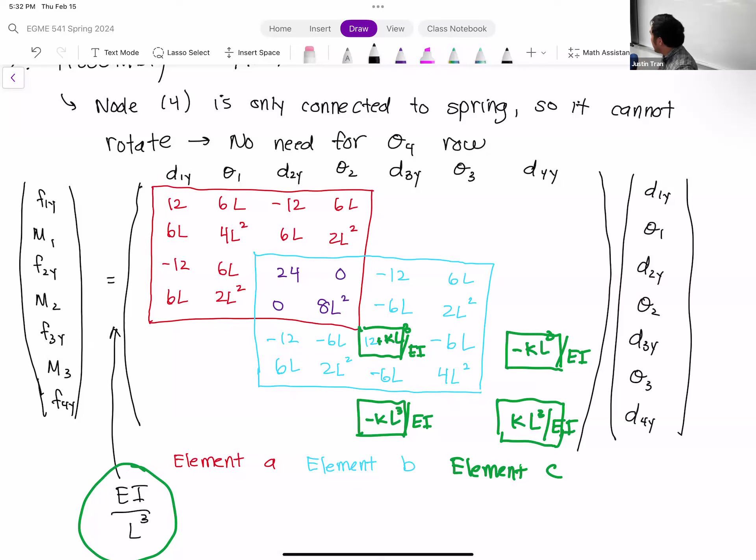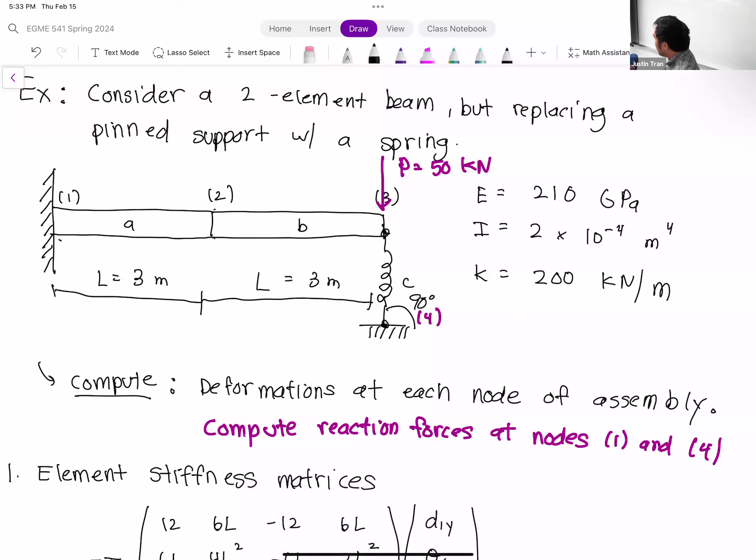The first thing we noticed was that beams' deformation modes are different than springs. Beams are capable of transverse deformation as well as rotation, whereas springs are only capable of expansion and contraction, which are axial deformations. If you look at the geometry for this problem, I put the spring perpendicular to the beam deliberately, combining both things. When the spring does its axial deformation, it's actually in the same direction as the beam's transverse deformation. So that allowed us to treat our spring here as a one-dimensional element instead of going through the whole two-dimensional 4x4 system.

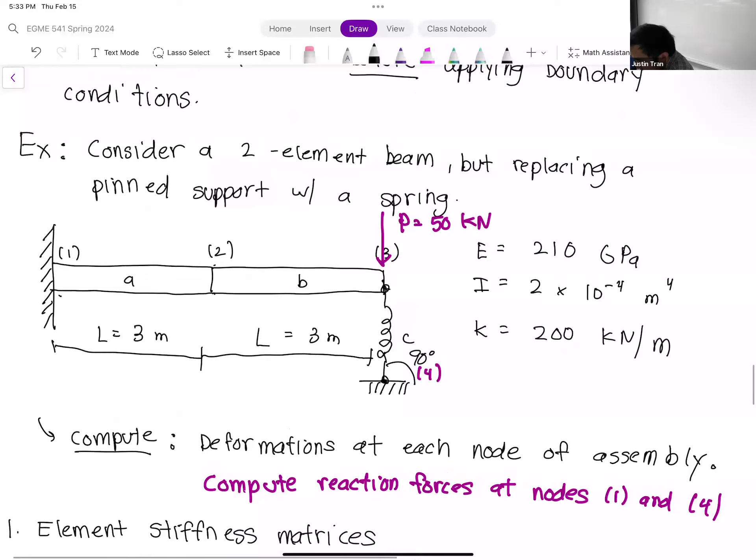What if the load was placed somewhere else along the beam? Would the effect still be the same? It would, still perpendicular? Yes. So if the load were placed here on node 2, the element stiffness matrices would all still be the same. Now if the force were in this direction, let's say we're doing an axial force here, we'd have to change our approach a little bit because the beam can't handle any axial deformation. In that case, we'd either change this to maybe a truss element, or maybe a frame element, which is capable of both axial, transverse deformation and rotations all at once. So it depends on the nature of the loading - you want to make sure your loading is consistent with the deformation that's allowed.

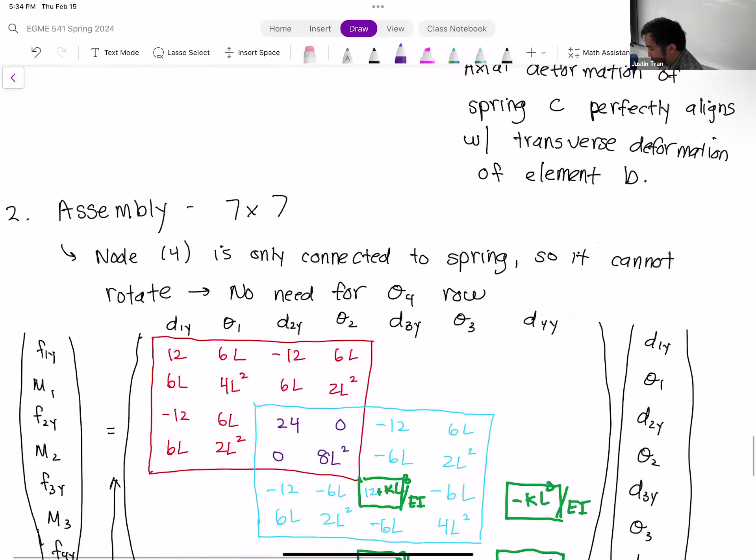Now that we have this 1D element for the spring, we can go ahead to assembly. That's what we left off with. When combining beams together with springs and trusses, you have to be aware that we often like to factor out EI over L cubed in front. If you're just doing a problem with beams, this is no issue, and you can fill the space here without problems. But notice the spring here...

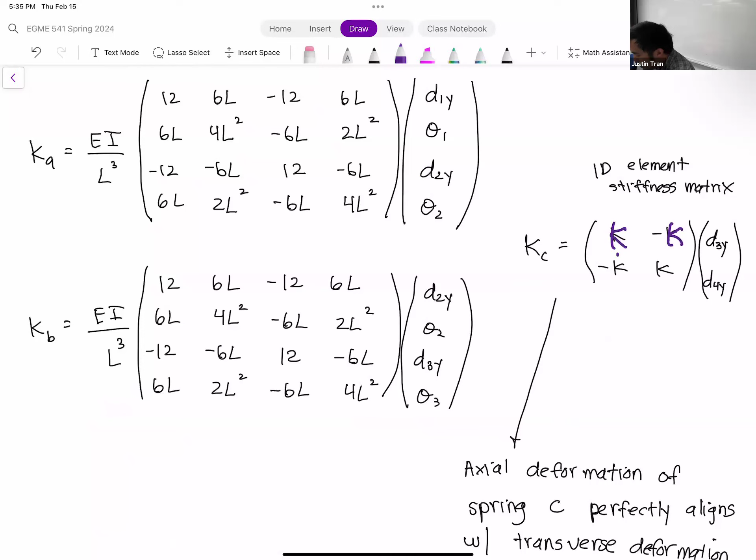The spring element stiffness matrix is only comprised of the spring constant K. So when we incorporate this into the element stiffness matrix, we want to make sure that everywhere we put the spring, it equals just K in that slot. What I did here was add K, but multiplied K by the inverse of the factor out front, so I have K L cubed divided by EI. When you multiply this factor through, it cancels out that factor and you end up with K. So you just want to be consistent with the units here.

This gets mostly dicey when you're combining different types of elements. We'll see this again in the next unit with frames as well. But that's just a small thing I wanted to make sure you guys caught.

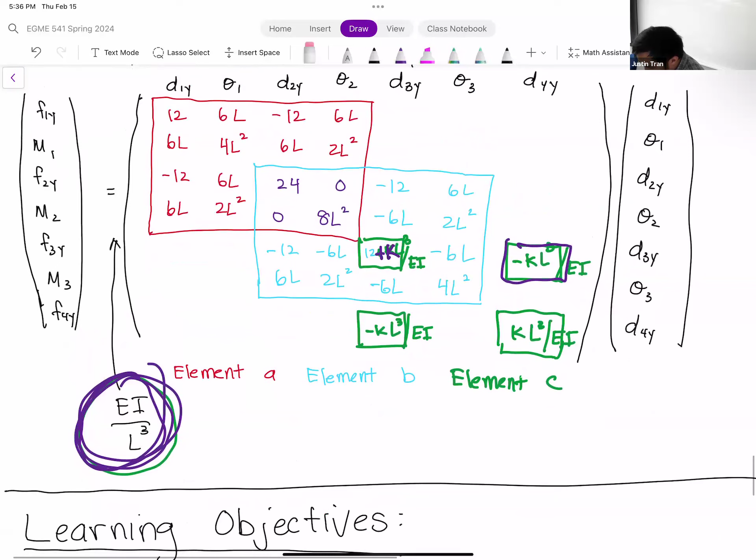Now that we've assembled all the elements, it's time to apply the boundary conditions. Our boundary conditions in this case are two fixed supports or fixed constraints. These are occurring at nodes 4 and node 1 -- I don't know why I said it in that order, it should be 1 and 4.

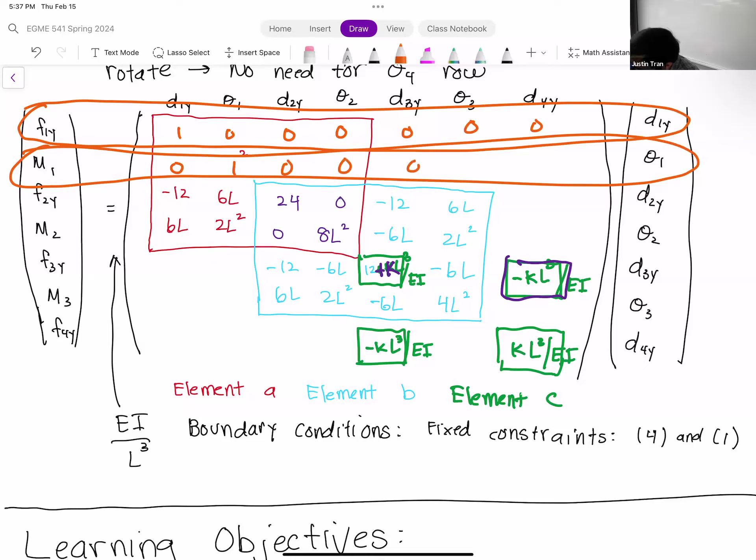What this basically means is that for any degree of freedom associated with node 1, so that's d1y and theta 1, we're going to apply our Dirichlet boundary conditions on these rows. We're going to change everything to 0 except for the diagonal: 1, 0, 0, 0, 0, 0, 0, and then 0, 1, 0, 0, 0, 0, 0. And in the forcing vector, we're going to transform those into zeros as well: 0, 0, 0. Then we'll apply the same on node 4.

But remember, node 4 was only connected to the spring, so we only have d4y. That means only this last row, the d4y row, gets transformed to zeros: 0, 0, 0, 0, 0, 0, 1.

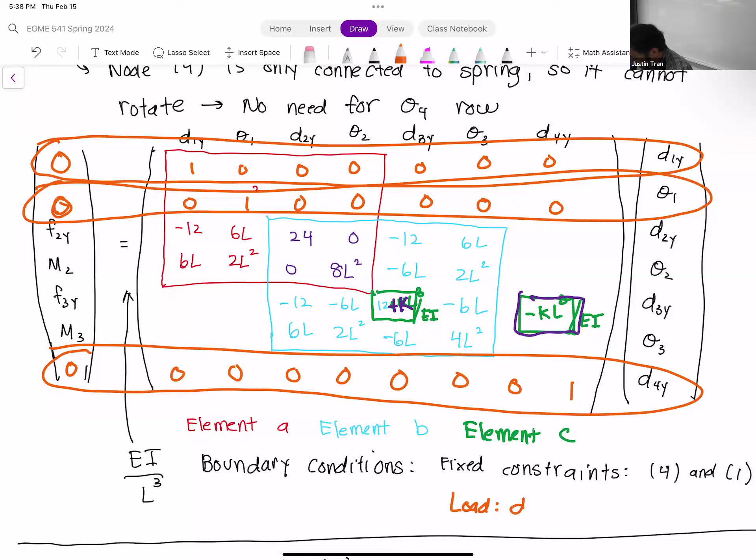While the iPad's catching up, or the internet's catching up, let's look at our loads. In this case we only have one load, a downward load applied on node 3. I believe it's node 3 -- let me confirm that. Yes, we have a 50 kilonewton load being applied on node 3.

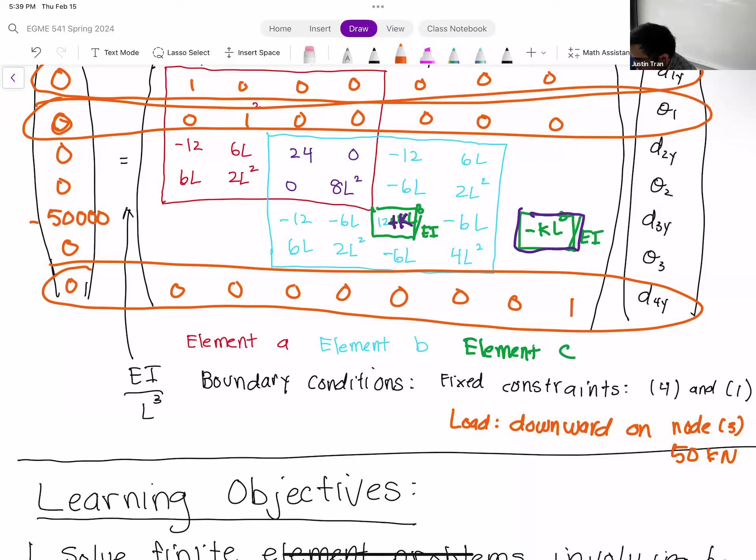So that means we're just going to change F3Y into 50 kilonewtons, that's minus 50,000. And of course everything else in the forcing vector that we don't have a load for, we're just going to apply 0 for that. So F2Y, M2, and M3 are all going to be 0. And all the empty space in the global stiffness system is going to be 0 as well.

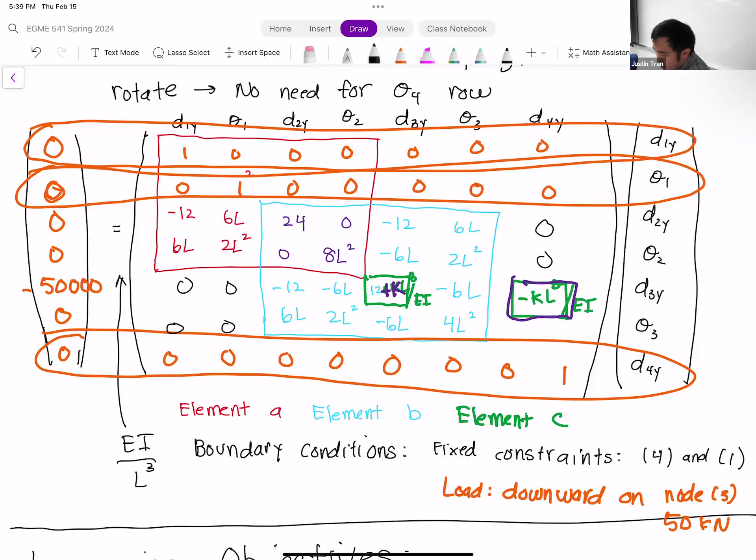So now our system here is ready to invert, and we can plug these matrices and vectors into MATLAB and solve for their result. And so the solution from MATLAB is the following.

We have d1y and theta 1, both of these are 0 because of the fixed constraint boundary condition. Then we have d2y and theta 2: d2y is minus 0.02 meters, and theta 2 is minus 0.012. The units technically the rotations are unitless, but not really -- the units we typically use, computed from here, are radians. So they're not degrees. You can convert those radians to degrees if you want, but leaving it in radians is just fine.

Then we have d3y and theta 3: d3y is minus 0.0638 meters, and theta 3 is minus 0.016 radian. And then finally, we have d4y, which is just 0 meters -- that's the fixed constraint.

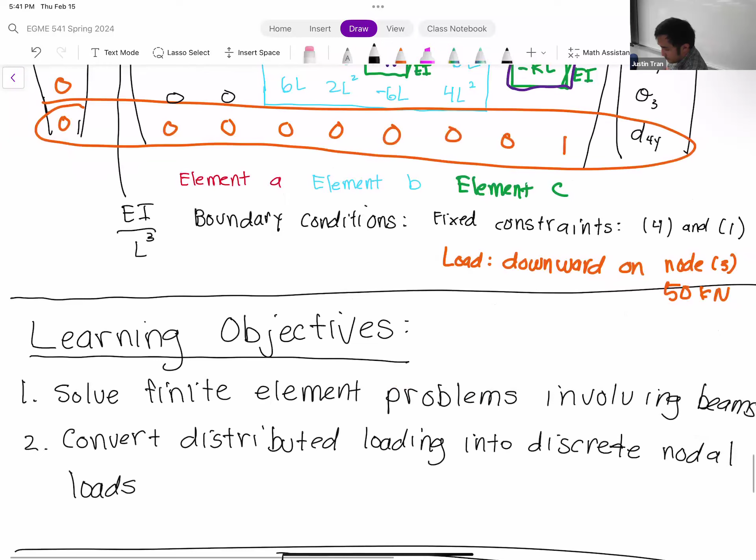Okay, so that's the solution for this. Any questions? Any other questions on this example here?

So the last thing I want to do with this example, before we move on to distributed loading, is compute the reaction forces. So if you remember from lecture Tuesday, once you have your deformation solutions, your values for d and thetas, you can plug that back in and solve for the reaction forces at the constraints. We have two constraints here, at node 1 and node 4. To keep the structure in static equilibrium, there have to be forces applied at these constraints to balance out all the forces in the system. Let's talk about how to compute that, or let's actually do it in this case.

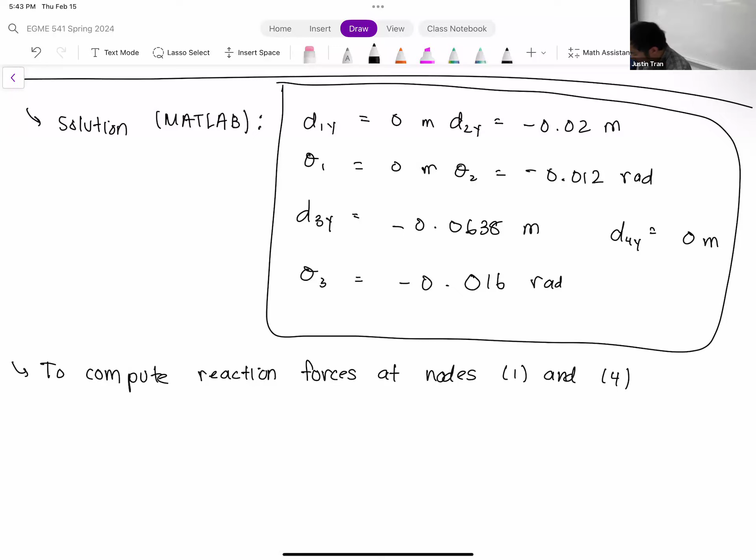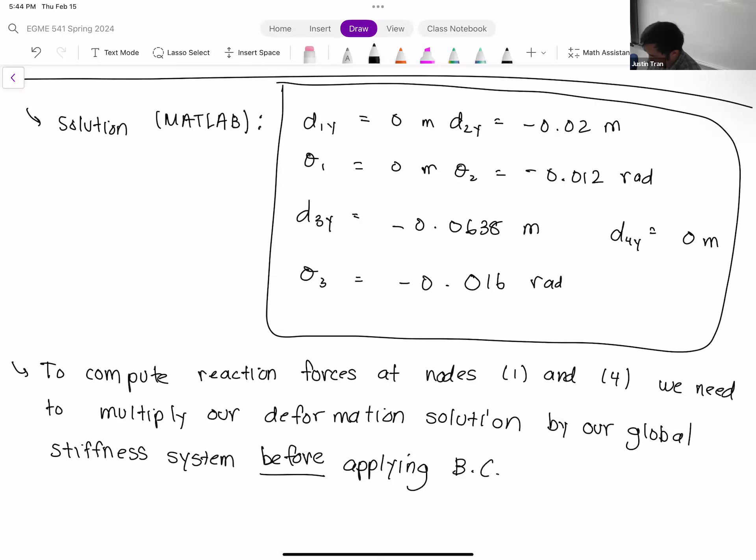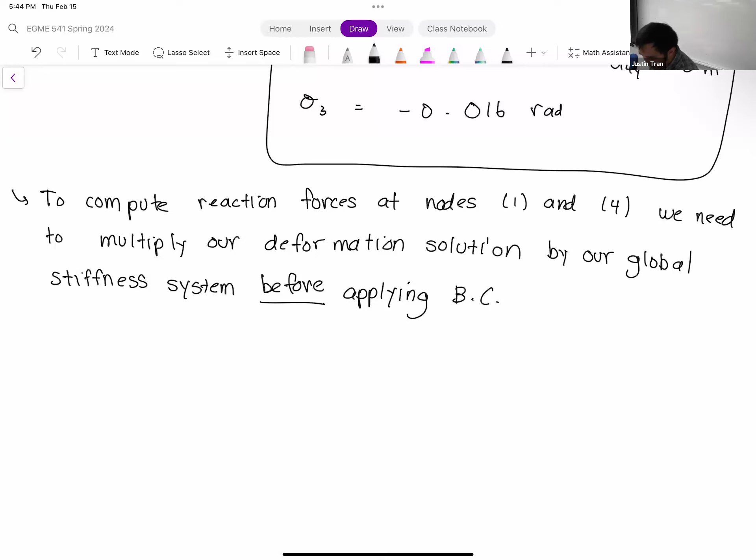To compute the reaction forces at nodes 1 and 4, where the constraints are, we need to multiply our deformation solution — that's the solution I have boxed just above this — by our global stiffness system, the one we had before applying the boundary conditions. Remember, this is right after the assembly step, before the boundary condition step. If you're smart and didn't erase the one we had before, this would be easy, but since I forgot we had this part, we have to write it again. So let me go ahead and write our global stiffness system again.

So EI over L cubed multiplied by: 12, 6L, minus 12, 6L, 0, 0, 0; 6L, 4L squared, minus 6L, 2L squared, 0, 0, 0. Of course all of these have numbers, but I'm just doing it symbolically so you can see. So you can see here I'm writing in the entries for the first element stiffness matrix, and we're just getting to the second one now.

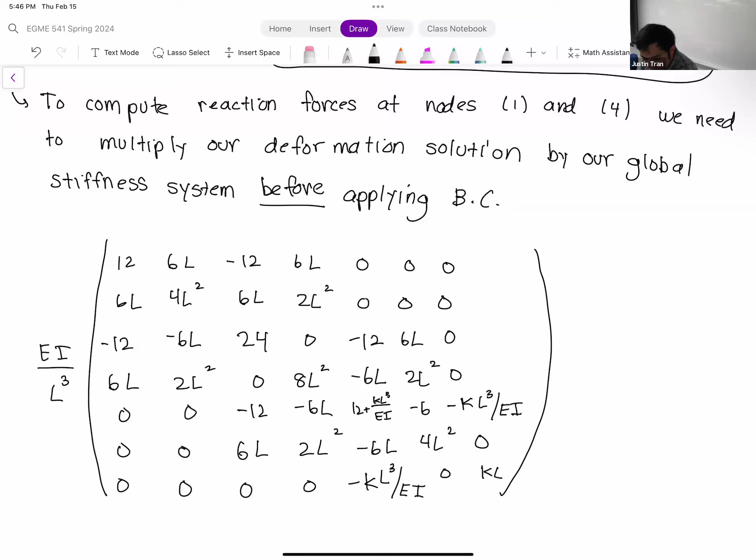Zero, zero, zero, zero, zero. Then minus 12, minus 6L. Then we have 12 plus KL cubed over EI, minus 6, and minus KL cubed over EI — those are the spring constant terms. If you already had this in your notes, I'm just writing it down for completeness since I erased the other one that was for the boundary conditions. But that's our 7x7 global stiffness system — what we obtained after assembling the element stiffness matrices for our 3 elements.

And we're going to multiply this by our deformation solution. So we have D1y, theta 1, D2y, theta 2, D3y, theta 3, D4. Since we already found the solutions for these, we can just plug them right in. So D1y is 0 meters, theta 1 is 0 radians, D2y is minus 0.02 meters, theta 2 is minus 0.012 radians, D3y is minus 0.0638 meters, theta 3 is minus 0.016 radians, and D4y is 0 meters.

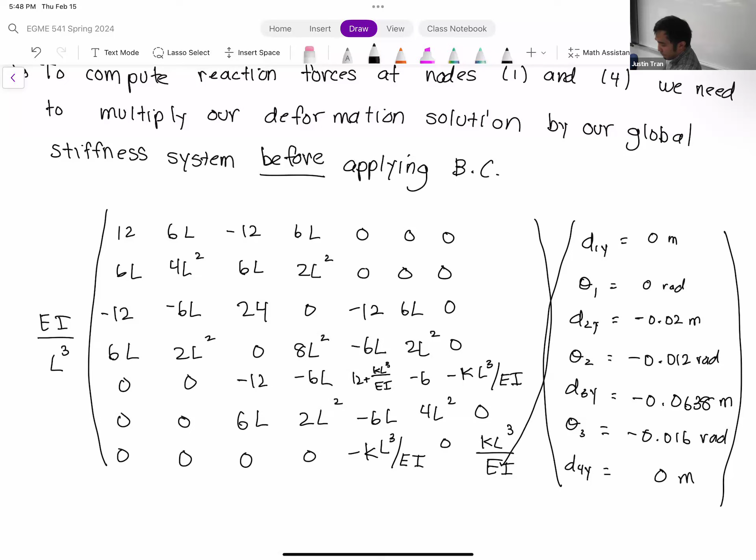So we have a 7x7 square matrix multiplied by a 7x1 column vector. This is most easily done on a computer — you can do it by hand, but it's going to take forever. If you have this matrix already in MATLAB, you can just do the matrix vector multiplication, and you'll get another vector solution here, which are going to be all the reaction forces: F1y, M1, F2y, M2, F3y, M3, F4y.

So we kind of do this a little bit backwards from what we usually do. In this case, we already have the deformation solution and we're solving for the forces instead. And so if you do this multiplication...

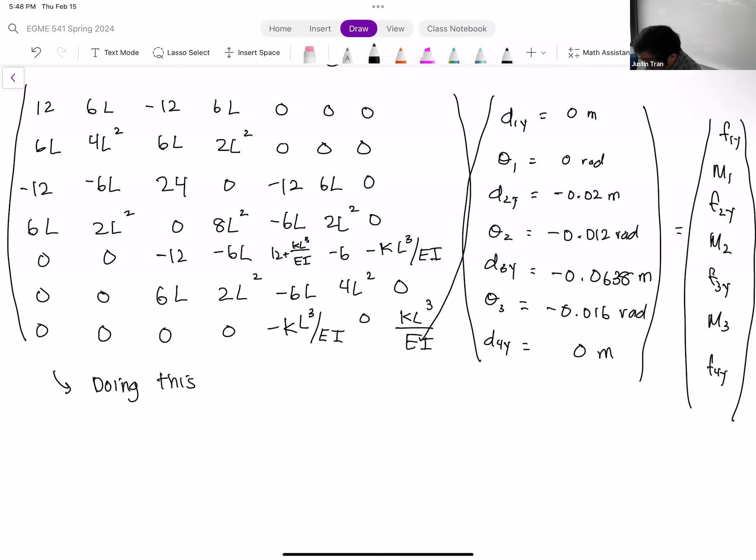You get the following solutions: F1y is equal to 37.23 kilonewtons, M1 is equal to minus 893.62 kilonewton meters. F2y is 0, M2 is 0 Newton meters. F3y — this is actually our original load, so this is minus 50 kilonewtons; that one's not a reaction force, that's the external force being applied onto the model. M3 is equal to 0, and F4y is equal to 12.77 kilonewtons.

All right, so it looks intimidating. There's a lot of values and variables floating around here, but it's just: you take your deformation solution, which if you're doing this in MATLAB you already have a variable for anyway, then you take your global stiffness matrix, multiply it, and then view the result.

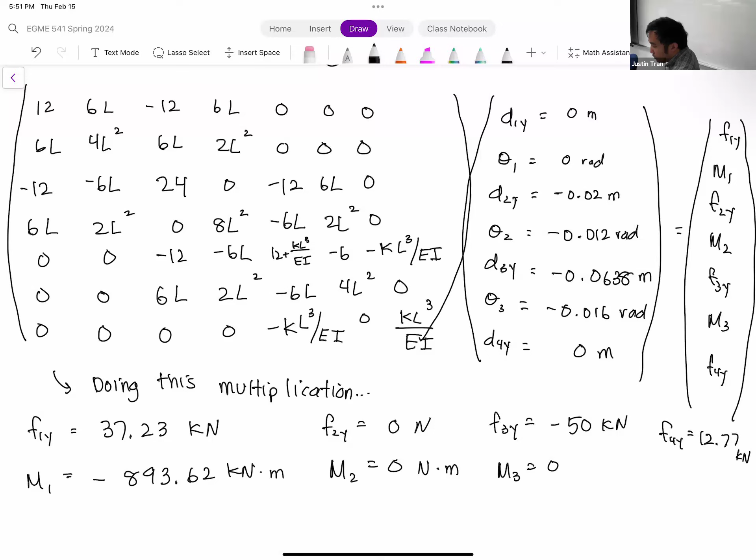To do that you would need to compute the stress in these elements. Remember what we talked about back in trusses, there's a way to compute stress by taking the deformation solution and multiplying it by its Young's modulus and things like that. You would need to test to see if any of those stresses exceed the yield strength of these materials. That's typically how it's done in these cases. It's going to be a lot easier to do in ANSYS, and once we get to ANSYS, probably a couple weeks from now, we'll discuss that there, because ANSYS computes these stresses automatically.

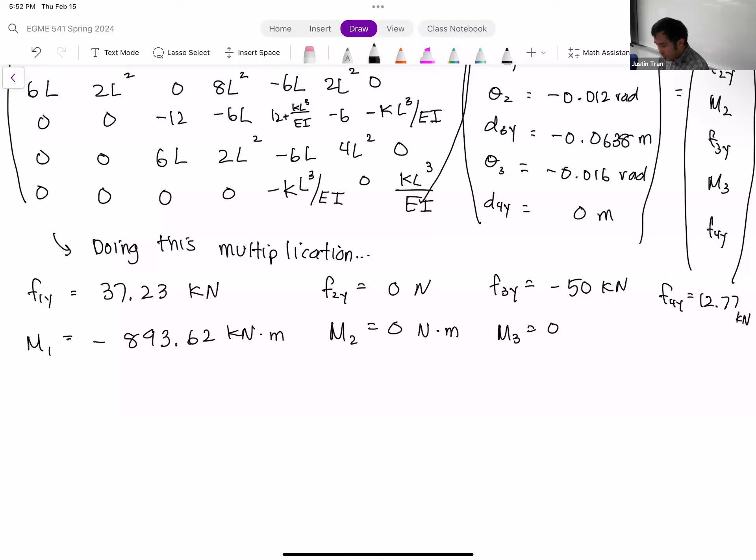Any other questions on this example? Okay, all right. So then the last topic I want to go over with beams is this topic of distributed loading.

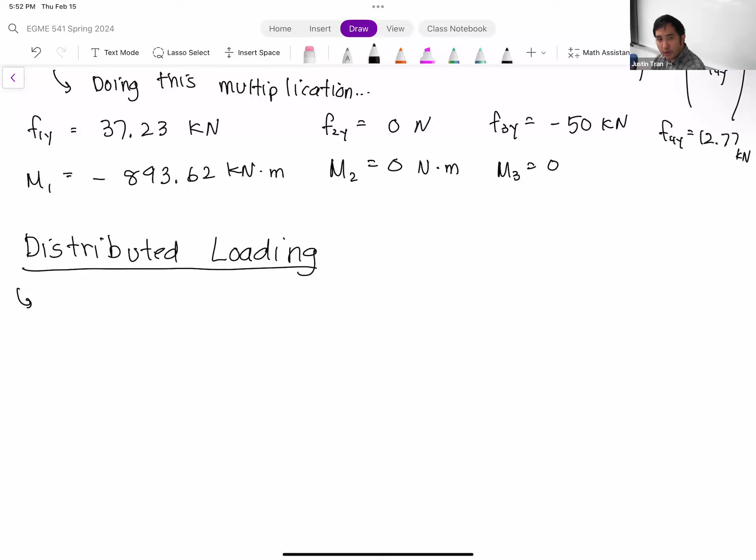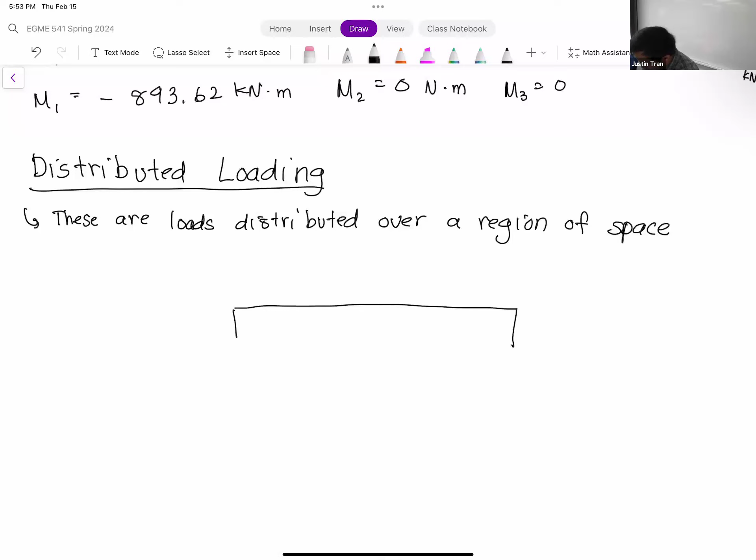A distributed load is a load that's distributed over typically an area, but we can be more general and say a load that's distributed over a region of space. Visually, they usually look something like this: if we have a beam, a distributed load would look like a load that's distributed over your entire beam, just like that.

So typically that's how we think of loading a lot of times, because what we've been doing up to this point in our direct stiffness problems is applying our loads at a point. If we have a beam, even if we break it up into, say, 3 elements A, B, and C, all the loads we've been considering have been applied at the joints in between the elements. Nothing distributed over the whole thing.

But the reason we've been doing point loads is that this meshes very naturally with the direct stiffness method. Think about how we apply our boundary conditions in our global stiffness system: when we have a point load, or a load applied at a point, we just insert that value directly into the matrix. So you can make the argument, and this is actually quite true, that in order to apply a load in a finite element sense, they need to be applied at what we call the nodes.

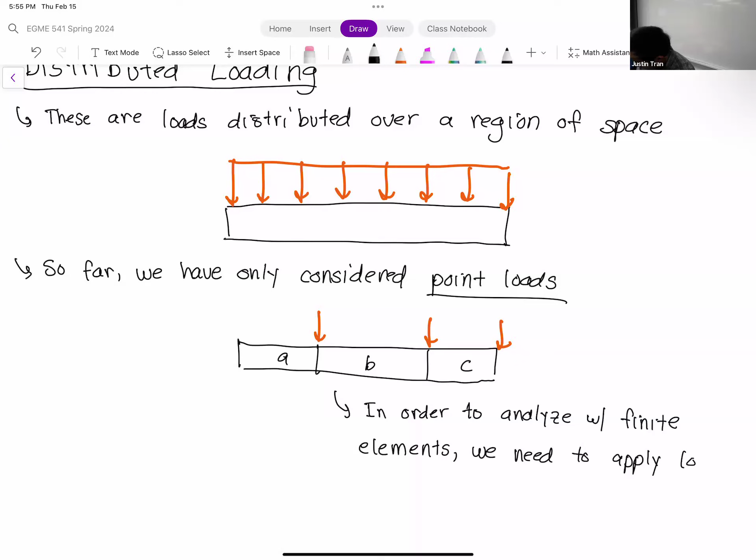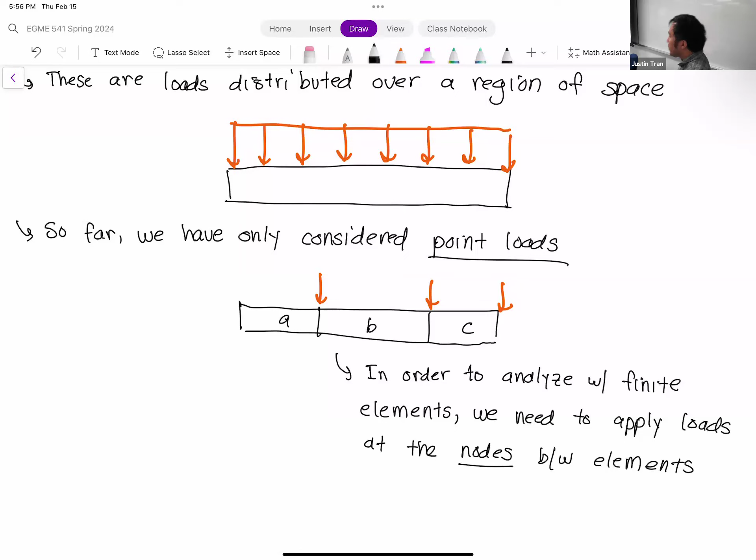We want to incorporate distributed loading, because that's often how we think of things. Let's say this beam is supporting a structure above it, so the weight is being distributed across the entire beam. Distributed loading is often how we naturally think of these loads, but we can't directly apply distributed loading in a finite element context. So we need to convert a distributed load to point loads so we can use that in a finite element context.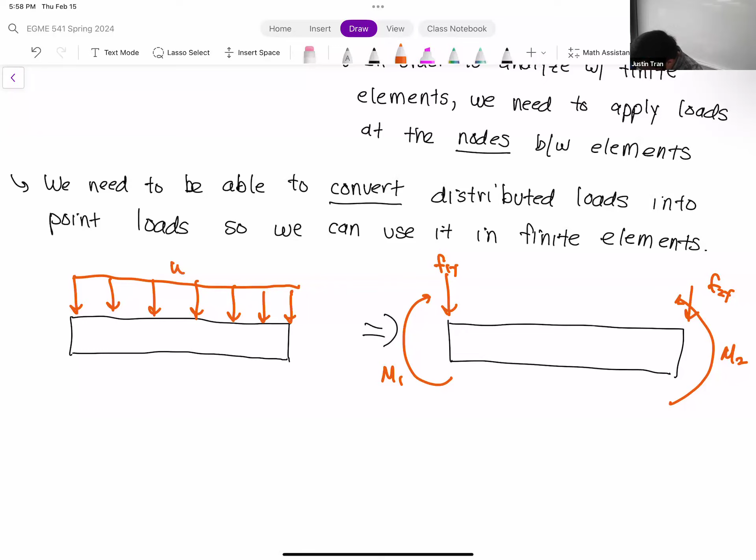So that's our goal here. We want to do this in a way where, if we were to simulate this with finite elements, the effect of the deformations on the right should be equivalent to the effects on the left. So we don't want to just choose F1y and F2y haphazardly. We want to do it in a smart way so that we still capture the amount of deformation, stress, and deflection as accurately as we can.

To do this, we're going to make use of a physical principle called work equivalence. All that basically states is that the amount of work the distributed loading on the left is performing should be equivalent to the amount of work the nodal loading is applying on the structure itself. Because in both cases, when you apply a load on a structure, it's going to deform, it's going to generate stresses inside the material, it may fail. So no matter if you apply the load in a distributed way or a nodal way, the amount of work done, the amount of deformation, should be equivalent.

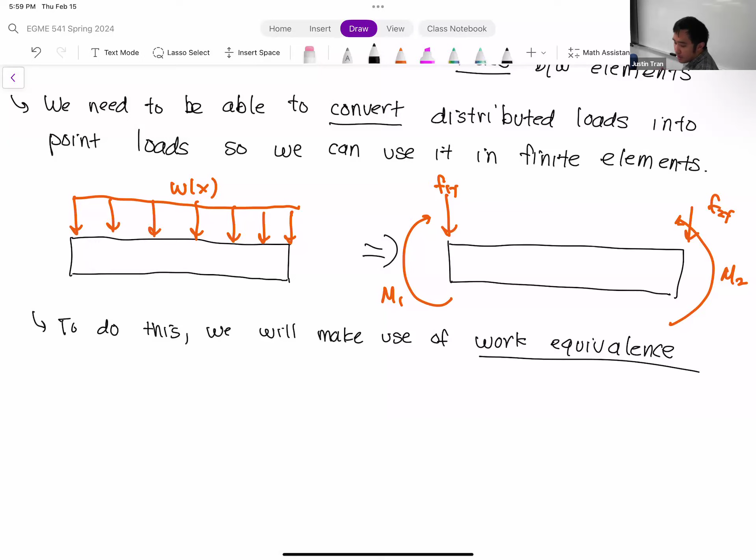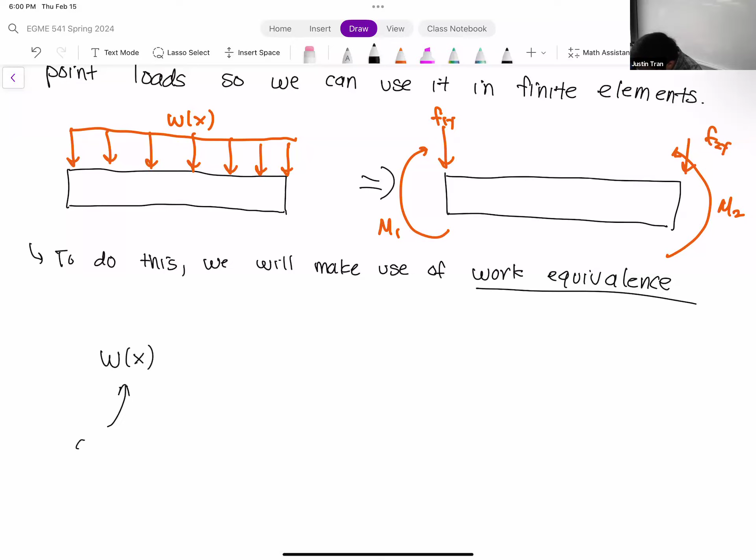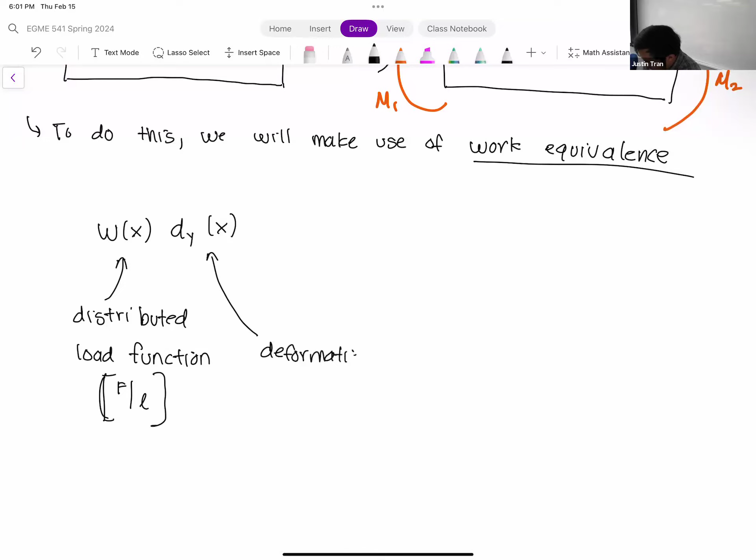Mathematically it looks like this. To compute work, work is nothing more than force multiplied by distance. So if we take our w of x, this is our distributed load function, it has units of force per length. And if we multiply that by the resulting deformation, which I'll call dy of x, both of those are functions of x because they vary as we go along the beam. Then if we integrate this, the integral of w of x times dy of x dx, that's the work done by the distributed load. So this whole quantity together is the work.

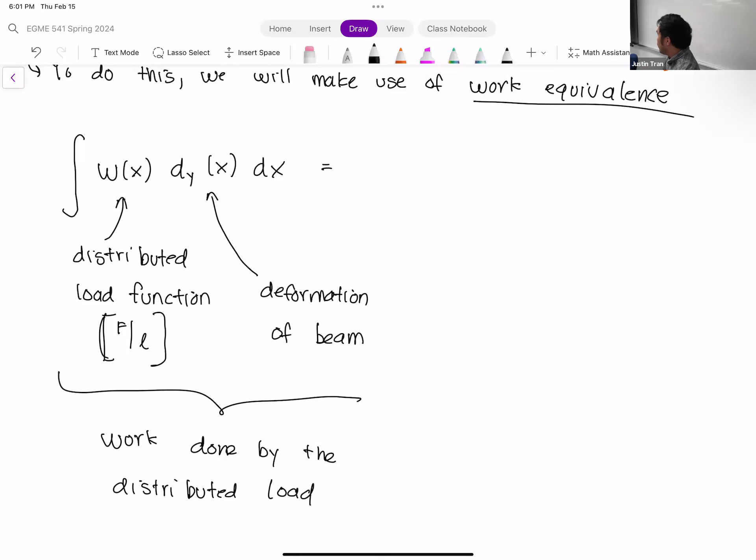That has to be equivalent to the same work done by the nodal load, by the concentrated loads. The work done by the concentrated loads is actually easier to compute because we're also going to be solving for their nodal deformations. So for a two node system like this, we have F1y, F2y. If we take F1y and multiply that by the nodal deformation there, we get F1y multiplied by D1y, and then we add that to F2y times D2y. Again, we have force multiplied by distance, giving us the work done by those nodal forces. We also have the work done by the moments as well: M1 theta 1, M2 theta 2. So these four terms right here are the work.

So everything on the right there is the work done by the concentrated loads.

So we're going to make use of this relationship here. Let me box this, it's going to be kind of key to our whole operation. We're going to make use of this relationship and the fact that these two quantities have to be equal to solve our conundrum.

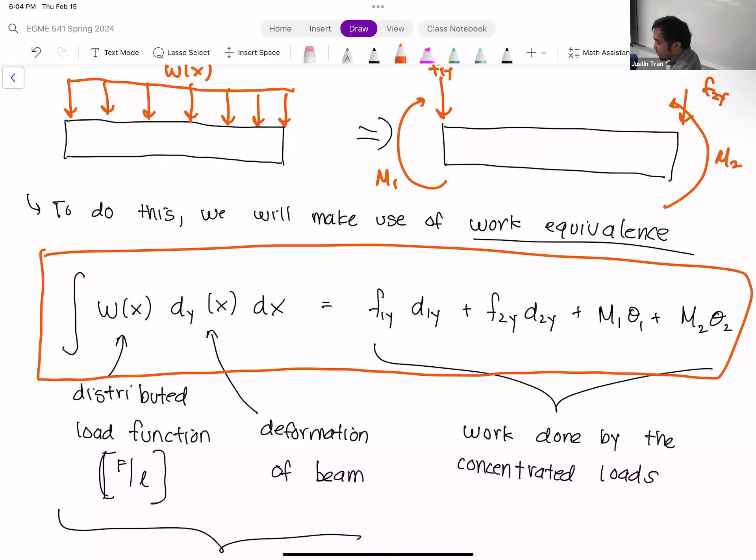So the reason I'm bringing this up before we go further, because the math gets a little bit hairy from here, is that this is something that has to be done internally in finite element softwares as well. We have a couple ANSYS activities planned, and oftentimes when we run ANSYS or any other finite element software, we typically apply our loads in a distributed sense.

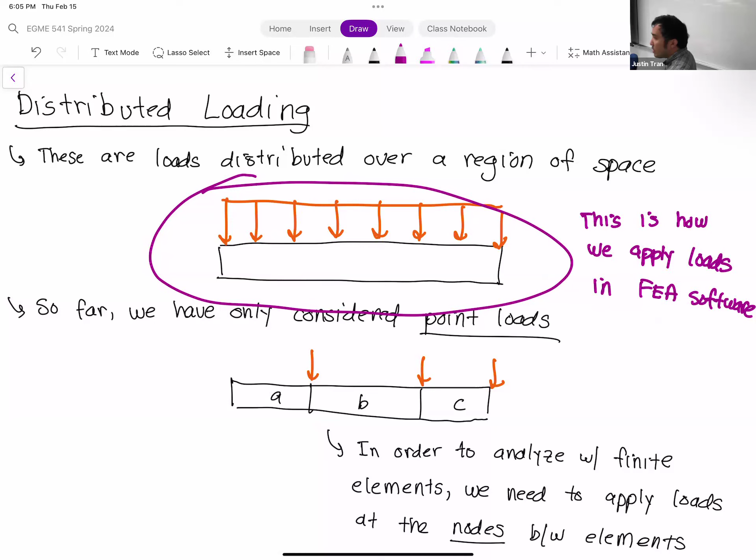But even for finite element softwares, a distributed load can't be used directly in a finite element context. Internally, ANSYS or Abaqus or whatever finite element software you're using is transforming your distributed load into these concentrated loads so that it can actually form the linear system. The linear system is kind of key to the whole operation for everything.

So the way we're going to use this expression here is we're going to work primarily on the left-hand side of the equation.

So we're going to be performing integrals, and then we're going to obtain and match it up with the terms on the right, because the things on the right are the things that we want.

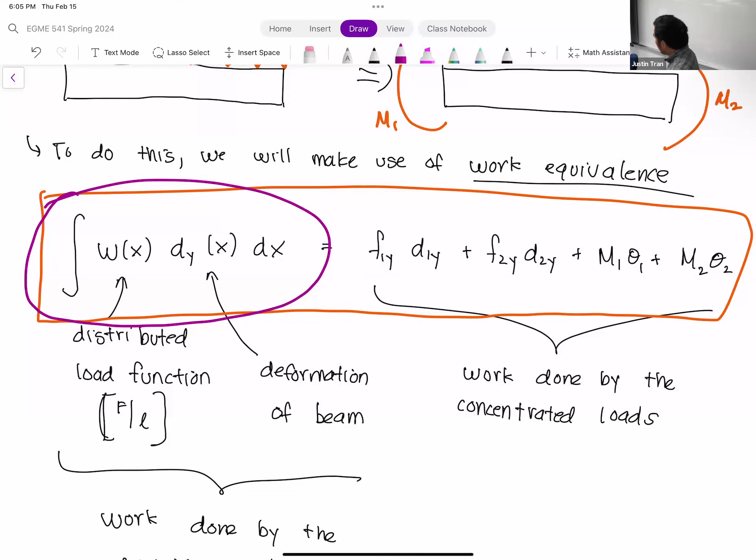And so if we look at f1y, f2y, m1, m2, these are what we want. And so the objective here is how to get the left-hand side to match up with the right-hand side.

So if you look at the left-hand side of this equation, there are two functions that we need to plug in for. The first being w of x. I'll just say right off the bat that w of x is usually given to you.

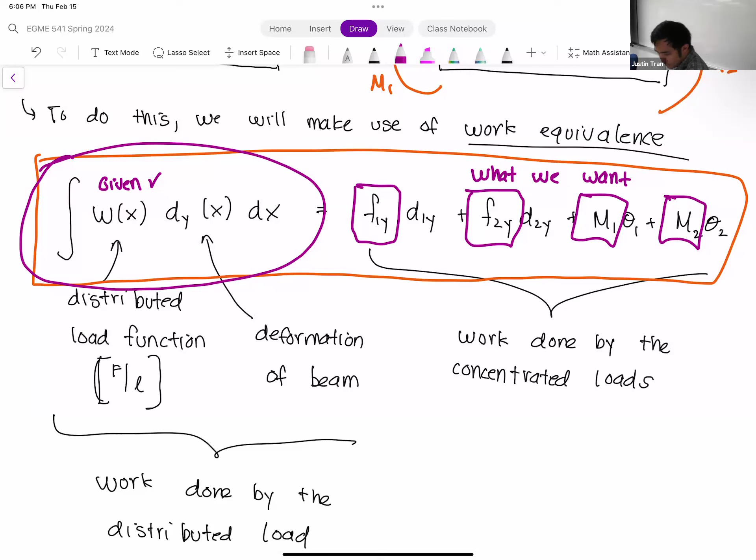Because that w of x represents your loading that's being applied onto your structure. That's something you intrinsically have knowledge of, because typically you are the engineer applying this load. We'll do an example with the given w of x — that's essentially just given to us. The biggest question mark here is this dy of x function.

So let's work on that. If we plug in a certain type of expression for dy of x, then we can actually evaluate this integral and obtain what we need to.

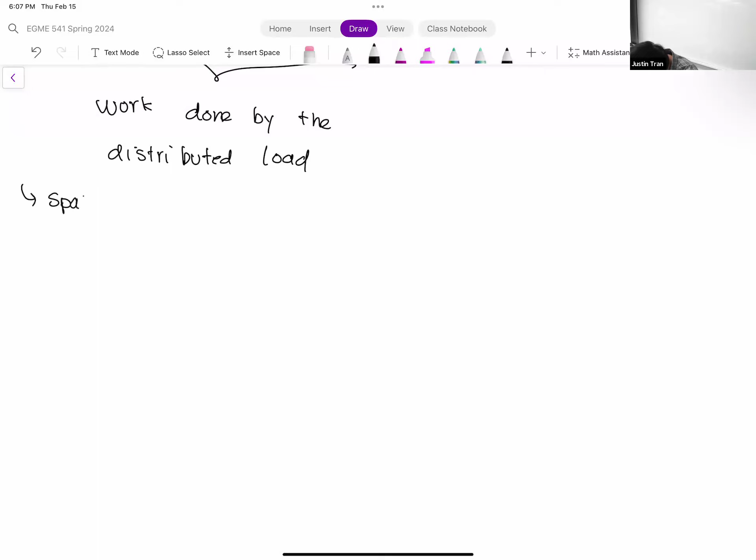So that dy of x is the spatial deformation, a spatial variation of deformation in the beam.

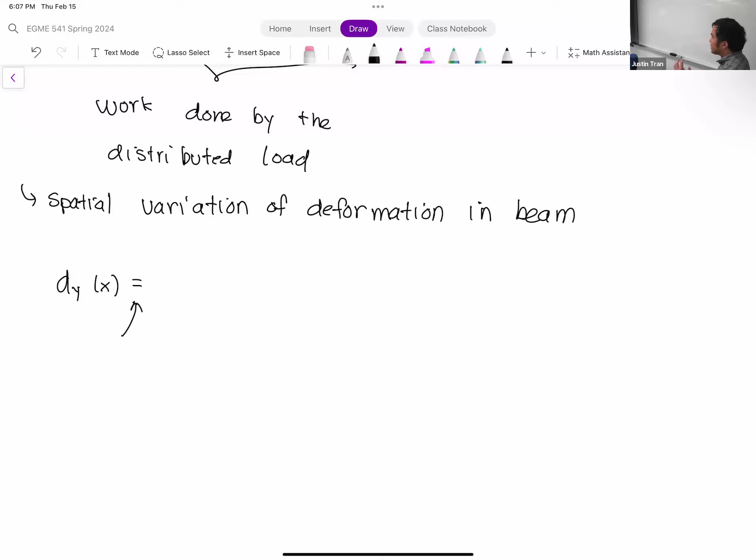All right, so we need to plug something in here. More importantly, we need to plug something in here that relates what we have on the left-hand side of that expression to the right. So what we're going to plug in is an expression that actually incorporates the nodal degrees of freedom.

I'm not going to go into the specifics of how this expression is derived, since we're a little short on time, but if you're curious, it also involves Euler-Bernoulli beam theory. I don't want to get too much into it, because on Tuesday I kind of skipped the derivation of the element stiffness matrix for the beam. This relates back to that.

I'll just say that this is from Euler-Bernoulli beam theory. I'll just give you the ending expression.

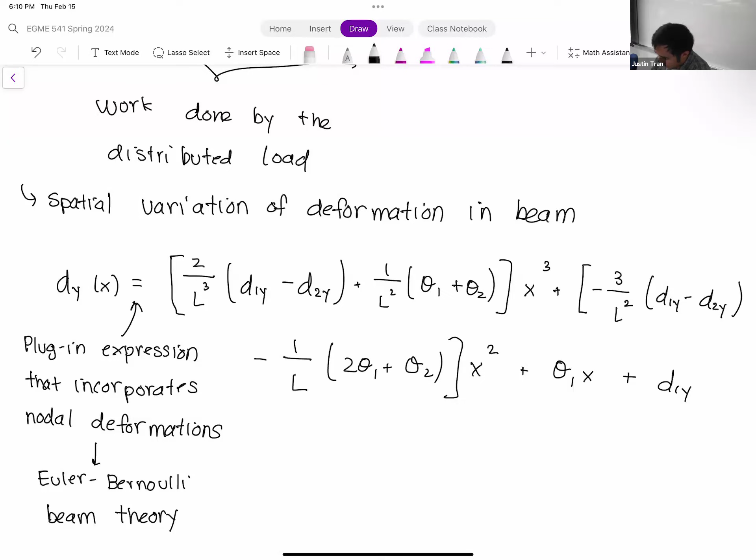So the ending expression here is: 2 divided by L cubed times (d1y minus d2y plus 1 over L squared times (theta 1 plus theta 2)), times x cubed, plus bracket minus 3 over L squared times (d1y minus d2y) minus 1 over L times (2 theta 1 plus theta 2), times x squared, plus theta 1 times x plus d1y. It's probably a little bigger and more complicated than you originally thought, but what's key about this expression is that you can see we have the nodal degrees of freedom: d1y, d2y, theta 1, theta 2.

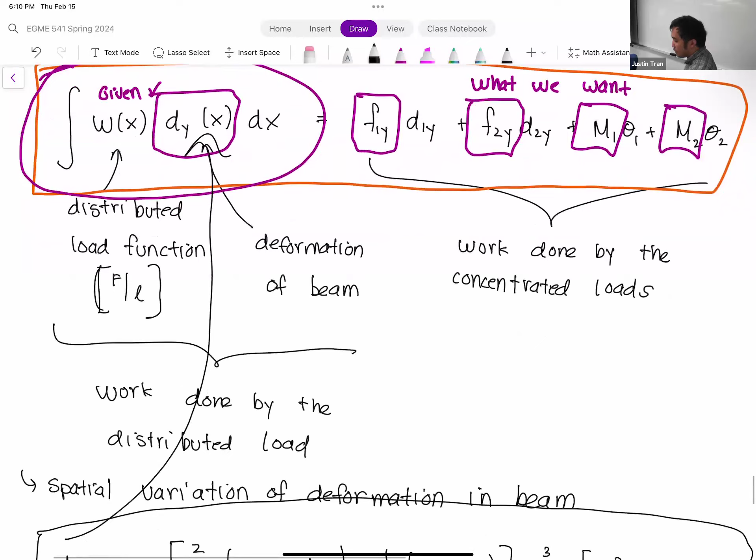Any questions on this before we do an example? Okay, let's do an example.

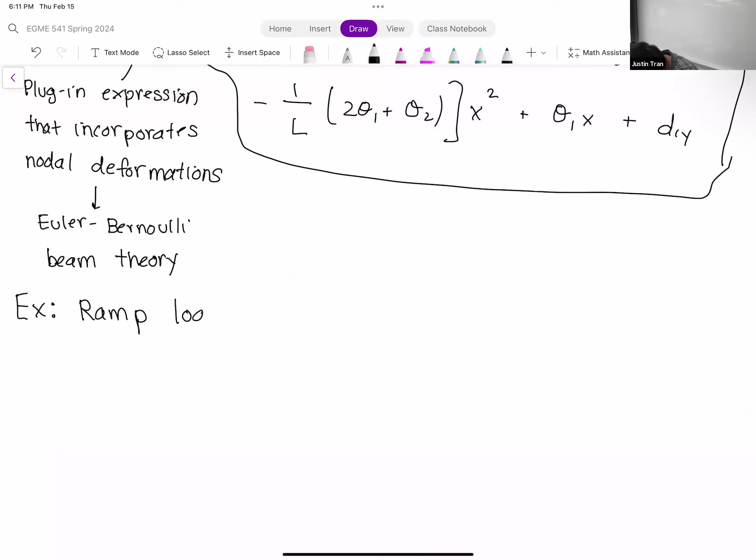Let's consider a beam subjected to a linear ramp loading, a loading that's going to ramp up as we go from one end of the beam to the other. Here's our beam, and our loading is going to look something like this.

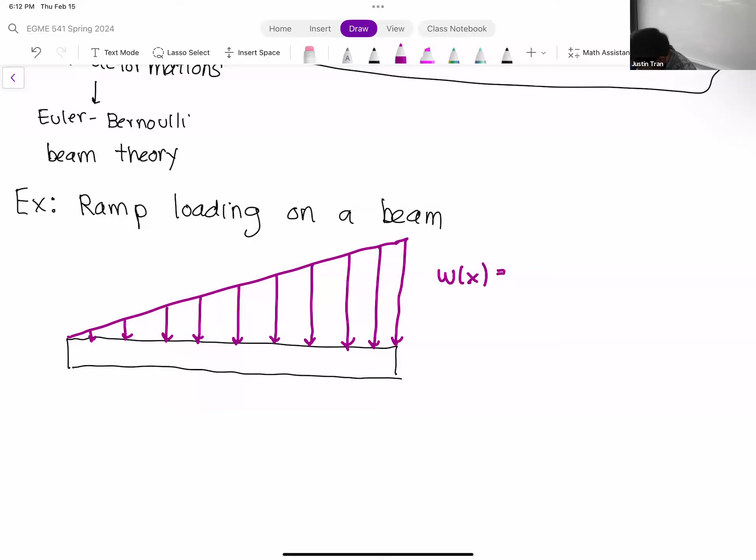The function that we're given for w of x is 5,000 times x. It's a linear function, so it varies with x.

There's no finite elements here, so we don't have any boundary conditions. So all we want to do in this problem is convert this distributed loading to concentrated nodes, or concentrated loads, at the endpoints.

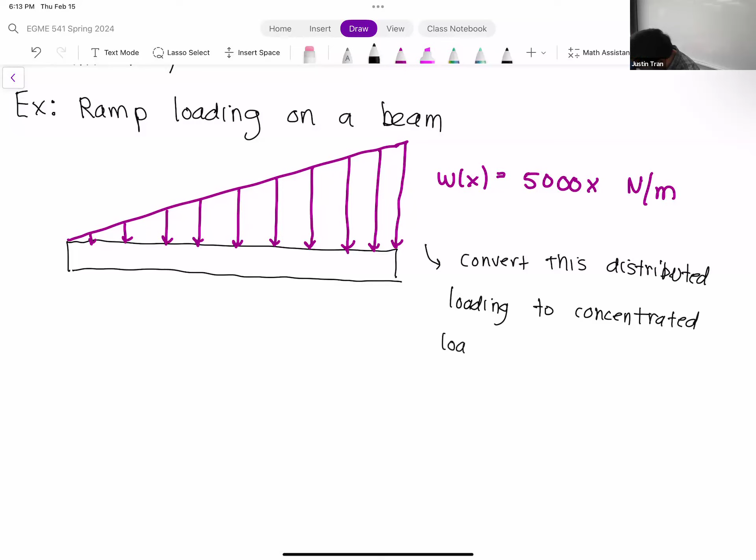We're going to make use of our work equivalence formula, our deformation equation, and our w of x. We'll evaluate the integral and then equate terms. What's going to follow is probably at least 20 minutes of just math, so I hope you guys are ready.

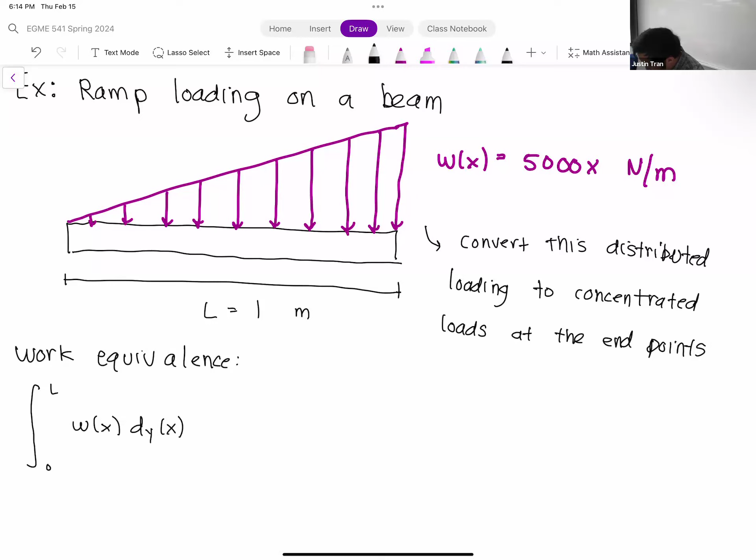Let's go ahead and get started. To solve this problem, we're going to make use of work equivalence. We need the length of the beam, L, which is 1 meter. Our work equivalence formula: the integral from 0 to L of w of x times dy of x dx is equal to f1y d1y plus m1 theta 1 plus f2y d2y plus m2 theta 2.

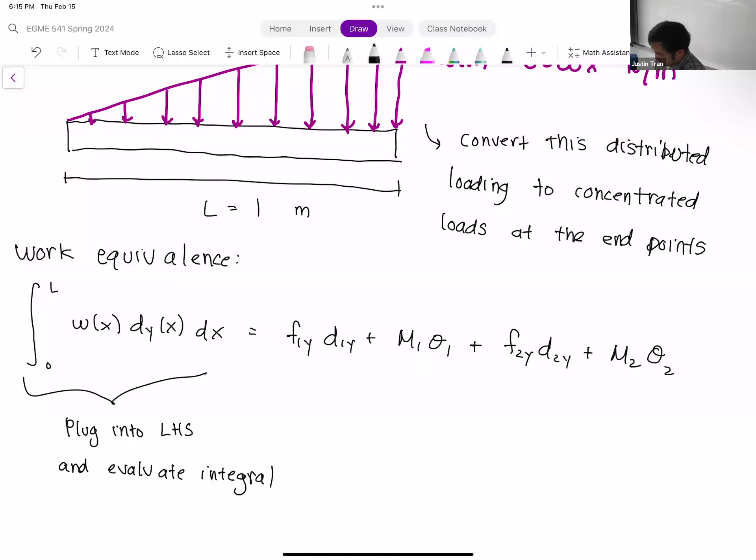So we're going to plug into this expression here, plugging into the left-hand side and evaluating that integral. The right-hand side we're just going to leave alone, you'll see where it comes in, but we have plenty to do on the left-hand side. We have the integral from 0 to L. Let's plug in for w of x first, which was given to us in the problem.

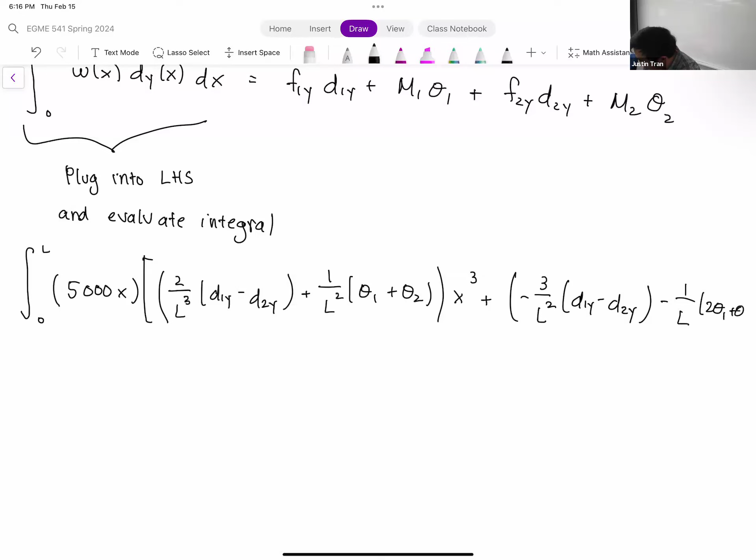This is 5,000x. Then we're going to plug in for dy of x, plugging this expression in as it is: 2 over L cubed times (d1y minus d2y) plus 1 over L squared times (theta 1 plus theta 2), all times x cubed, plus minus 3 over L squared times (d1y minus d2y) minus 1 over L times (2 theta 1 plus theta 2), times x squared, plus theta 1 times x, plus d1y. And all that is integrated by x.

That expression for dy looks very scary, but know that most of these are constants. Remember, we're integrating this in x, so the only terms we actually have to integrate are the x terms, and there's only four of them: an x cubed, an x squared, an x, and a constant term. The x is multiplied through all this too, so a lot of these terms are just kind of freeloaders, along for the ride the whole time.

Any questions on this? Okay, but before we move on, let's plug in because there's a lot we can actually plug in for, and let's simplify this a little bit. In this step I'm just going to be simplifying a lot of things, doing a few steps at once, but let me summarize each step I'm going to do.

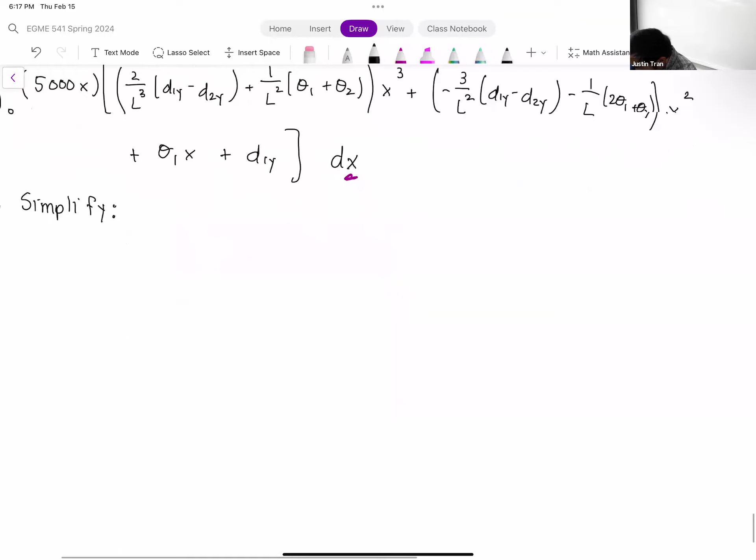Number one: first thing I notice is I have a 5,000, which is just a constant term multiplied by the whole thing. If you remember from calculus, constants don't really affect the integration, so we can pull the 5,000 out in front and kind of just forget about it until the end.

All right, the next thing I'm going to do also involves that first expression, the 5,000x. I know that this x is multiplied by everything within these square brackets, so I'm going to distribute this x throughout. If you'll notice, it's going to raise the power of x for each term by 1. So instead of the first term being x cubed, it's going to be x to the 4th. This term on the end, instead of being x squared, becomes x cubed. This theta 1x becomes theta 1x squared. And this d1y, which is a constant term, becomes d1y x.

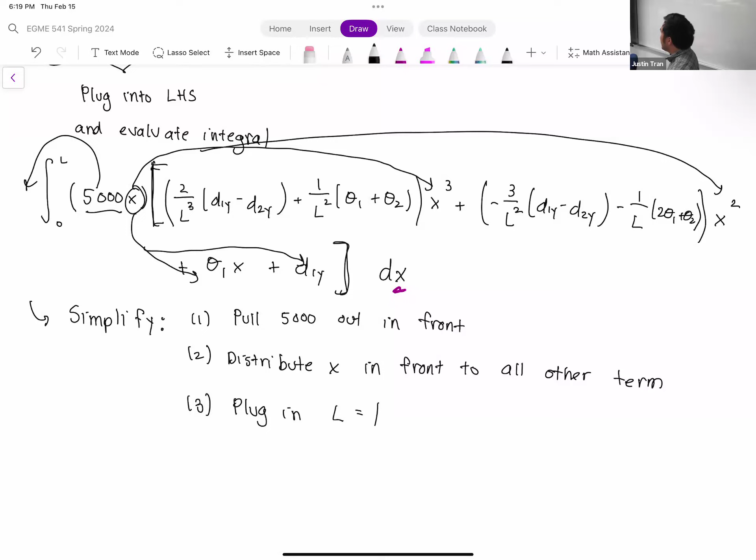All right, and then number 3. Steps 1 and 2, you almost always want to do for any of these types of problems. Step 3, sometimes it helps if your length is something convenient. In our case, our length is very convenient, it's just 1, so everywhere we see L, we're just going to plug in 1. After we do that, we should have a form that's much easier to integrate. So let's go ahead and apply all these steps here.

So we have a 5,000 out in front. Our integral is now between 0 and 1, because we plug in 1 for L. Then from here we have 2 — that 2 was over L cubed before, but since we plug in 1, it just becomes 2. That's 2 times (d1y minus d2y plus 1 over L squared, which just becomes 1), so this is plus theta 1 plus theta 2. And all that is multiplied by x to the 4th, because we distributed that x throughout.

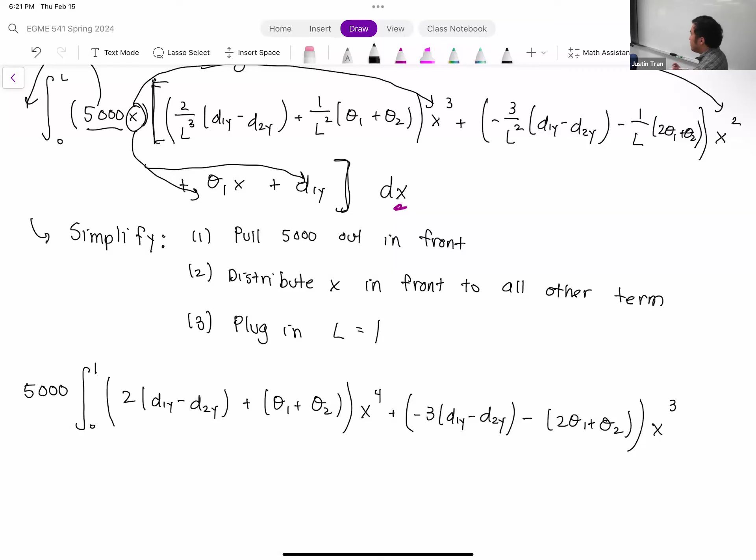Plus minus 3 times (d1y minus d2y minus (2 theta 1 plus theta 2)), once again plugging in for L there. We multiply that entire term by x, so its power of x raises by 1, going from x squared to x cubed. Then we have theta 1x multiplied by x, giving us theta 1x squared. And then our last term, d1y, which is just a constant, multiplied by x becomes d1y x. And we're integrating over dx.

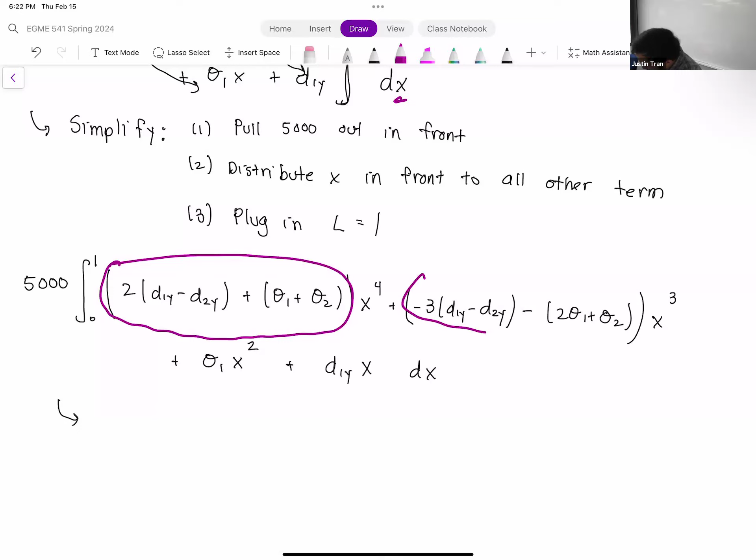All right, so now that we have our expression in this form, we're ready to integrate. The integration is actually a lot easier than you think, because a lot of these terms are not going to be integrated — they're essentially just constants. So everything that I've circled in purple, these are not functions of x, and so we don't need to integrate them. The only things we need to integrate are the x terms.

So we have the integral of x to the 4th, that's pretty easy — that's x to the 5th divided by 5. And the integral of x cubed is x to the 4th divided by 4. And x squared and x work the same way. So our next step is to integrate.

So we have our 5,000 here. Even though we pulled the 5,000 out, it's easy to forget about it, so make sure you bring it along every step of the way. From here we have 2 times (d1y minus d2y plus theta 1 plus theta 2). We integrate x to the 4th and get x to the 5th divided by 5. Plus minus 3 times (d1y minus d2y minus (2 theta 1 plus theta 2)).

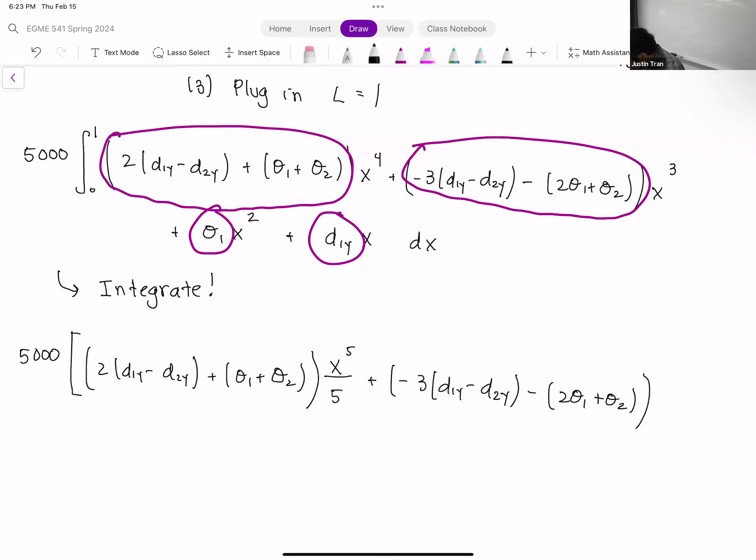We integrate x cubed and get x to the 4th divided by 4. Then we have plus theta 1x squared — we integrate x squared and get x cubed divided by 3. Plus d1y, and the integral of x is just x squared over 2. And then we're going to evaluate this between 0 and 1.

That's the integration, and it ended up just being integrations of polynomial terms, so not too bad. The next step is going to be to apply the bounds of this integration.

So for every term that we have x in there, we're going to plug in 1 and plug in 0 and subtract. So the next step is to evaluate the integration.

I'm going to do this term by term, just to make things a little bit easier. Let's not forget the 5,000. We have 2 d1y minus d2y plus theta 1 plus theta 2.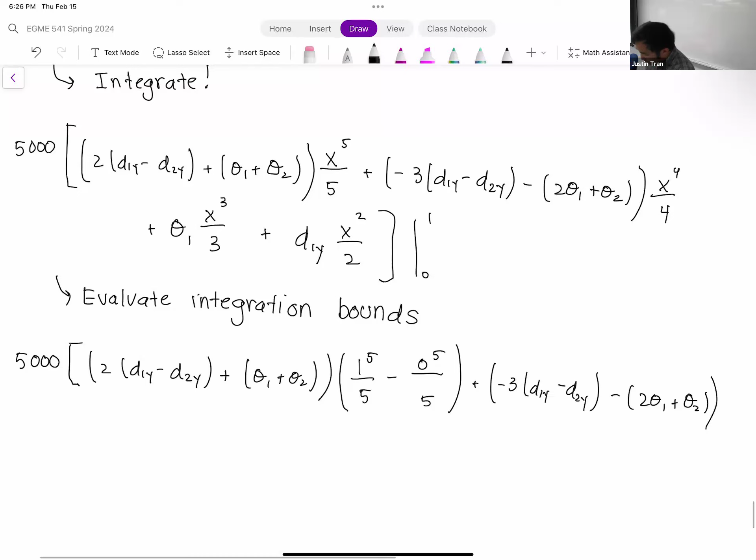Then we have a plus minus 3 times d1y minus d2y minus 2 theta 1 plus theta 2. Then we're going to evaluate x to the 4th over 4, and that's going to be 1 to the 4th divided by 4 minus 0 to the 4th divided by 4.

Then we have our final two terms, much shorter. We have theta 1 times 1 cubed divided by 3 minus 0 cubed divided by 3. And we have d1y times 1 squared divided by 2 minus 0 squared divided by 2.

Let me pause here just to give people a chance to pick up on the writing. Are there any questions on anything we've done here so far?

All right, lots of integration. We're in the home stretch. We're getting close.

So of course, everything with 0 here is just going to cancel out. I'm just going to put an X through everything with 0.

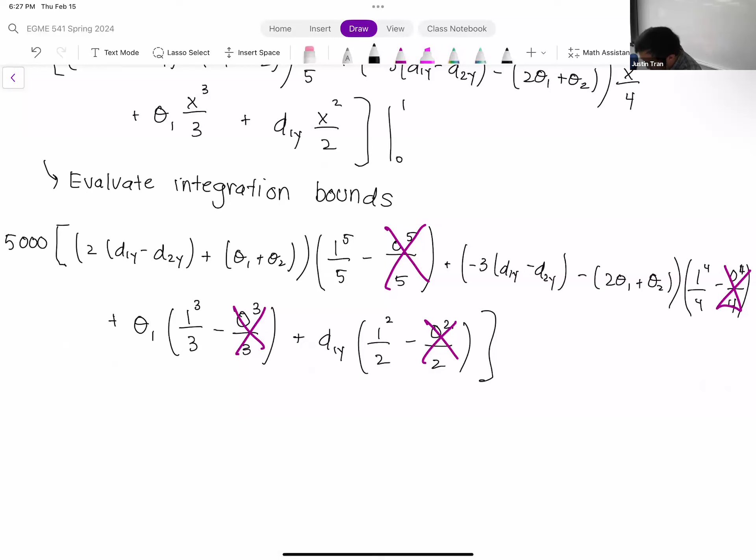And so the next step is we're going to distribute. Or in other words, this is going to be another step of simplify, because now that we've performed the integration, we have a lot of common terms. So the first step is to distribute all the fractional terms or fractional coefficients.

We have a 1/5 that's going to distribute through all 4 terms on the first one. We have a 1/4 distribute there, 1/3, 1/2.

Let's do that first, just because it's quite a bit to do. We have 5,000 multiplied by 2/5 d1y minus 2/5 d2y plus 1/5 theta 1 plus 1/5 theta 2. So everything there was from the first expression, I just took that 1/5 and distributed all throughout.

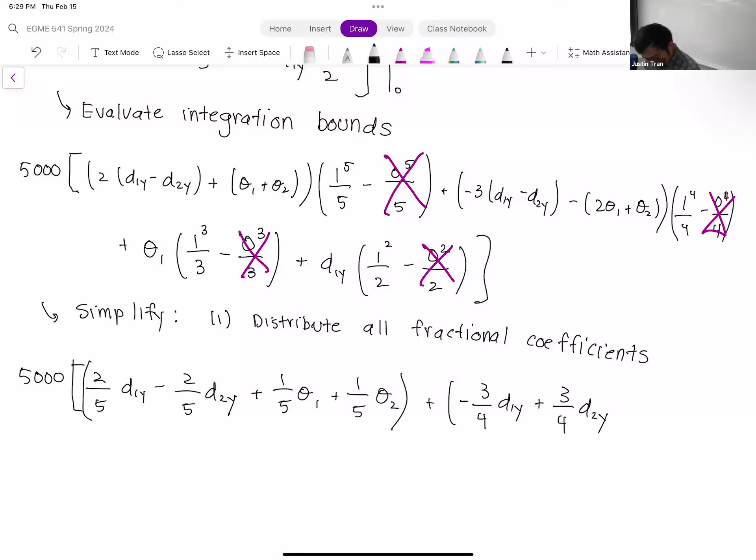Next, we have a plus minus 3/4 d1y plus 3/4 d2y minus 1/2, that's 2 over 4, so that's 1/2 theta 1 minus 1/4 theta 2.

These last two are easy, so we just have a 1/3 theta 1 plus 1/2 d1y.

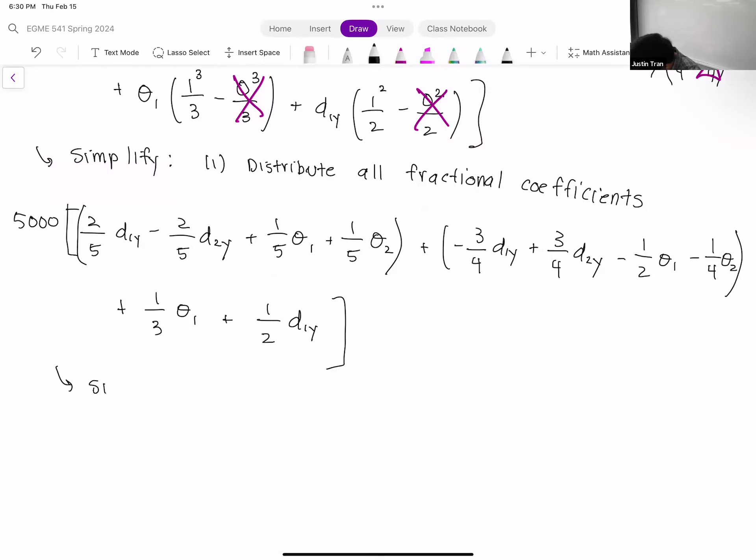Now that we've distributed all the fractions, it's a little bit easier to kind of keep track of everything. So let's do another simplify step, and here we're going to combine all the like terms.

If you notice, we have a bunch of D1Ys, D2Ys, theta 1s, theta 2s, and they show up multiple times. So let's go ahead and combine all of them.

We're going to use the 5,000 in a second, so don't worry about it. For D1Y, we have three terms here: the 2/5, the -3/4, and a 1/2. I can't do fractional math in my head right now, so we're just going to look at the answer. This is going to add up to 3/20 D1Y.

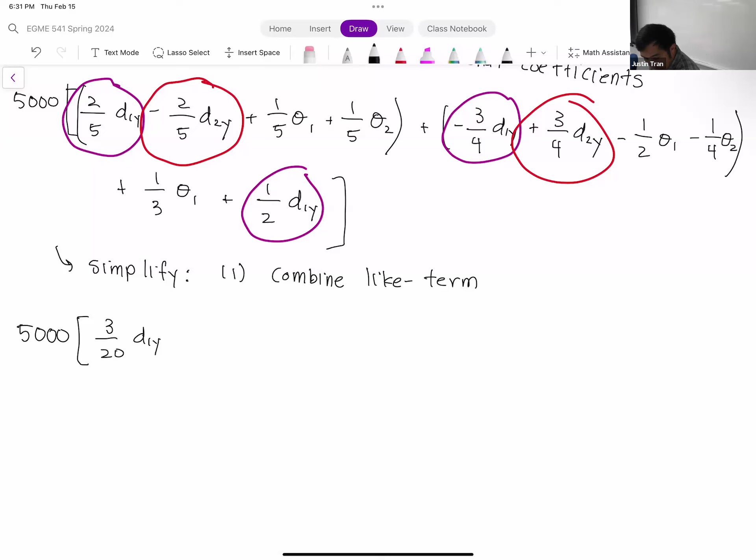Next we have D2Y. For D2Y, we have a -2/5 and a +3/4. We combine those together and what we get is a positive 7/20.

All right, next we have the theta 1 term. For theta 1, we have a positive 1/5, a -1/2, and a positive 1/3. You add those all together, and what you get is a positive 1/30.

And then finally we have theta 2. We have a positive 1/5 and a -1/4. So 1/5 minus 1/4, that is a -1/20.

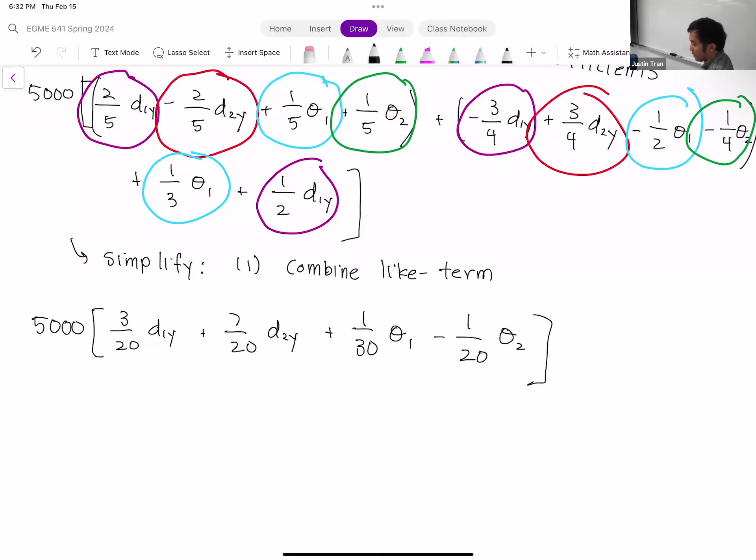Right. So finally, now that we're at this point, we can distribute the 5,000. We distribute that 5,000, we get 750 D1Y plus 1750 D2Y. We have 500/3 theta 1 minus 250 theta 2. Okay.

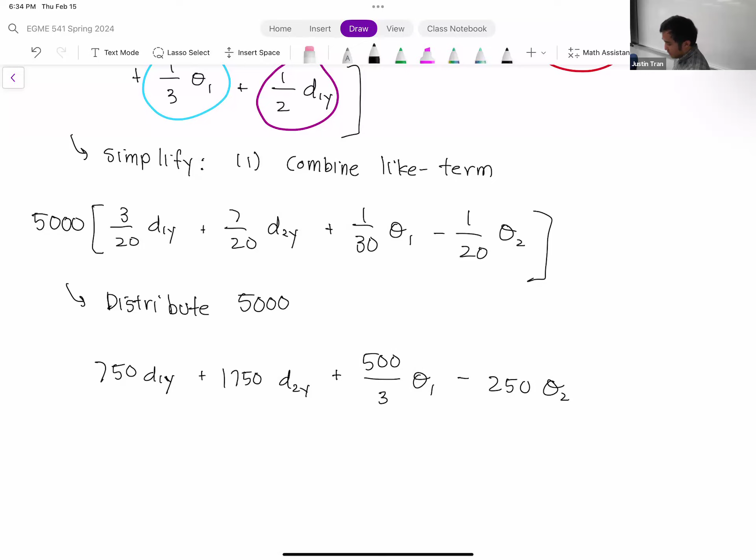All right, so that was a lot of math. But we're just about done here because now that we've evaluated this integral, now we can apply our work equivalence here.

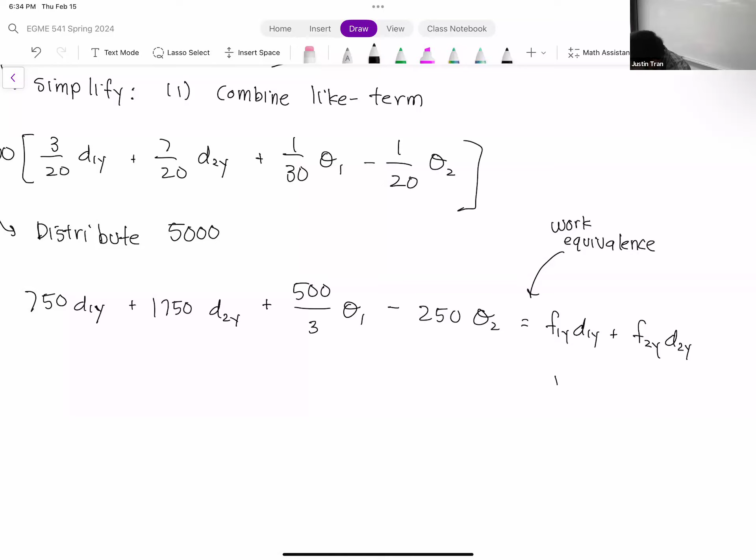Remember when we started this whole integration, what we said was that this expression is equivalent to the work done by the concentrated loads. So this is going to be F1y D1y plus F2y D2y plus M1 theta 1 plus M2 theta 2. And so if we just match terms up, right?

We can see here that the 750 D1y, the only thing that could be equal to is F1y D1y. So we have the 750 equals F1y. Both of those are multiplied by D1y, so that tells us that F1y here is equal to 750 newtons.

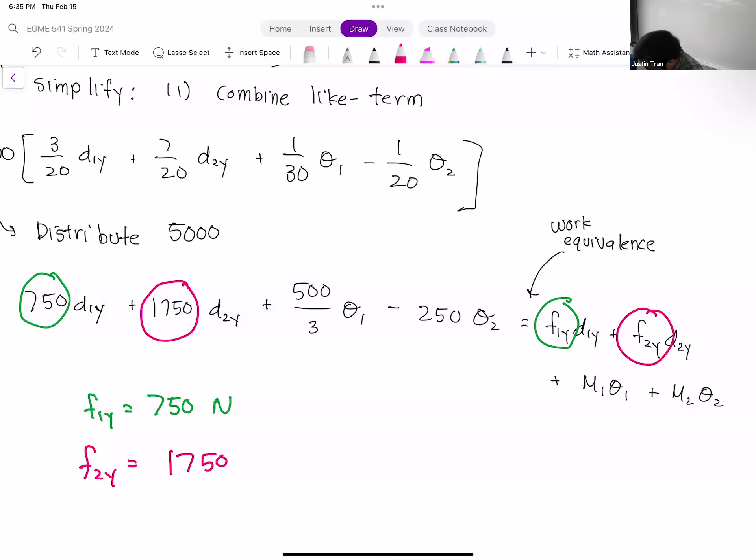Next, we have the 1750 and the F2y. So that tells us that F2y is equal to 1750 newtons.

Now next we have M1. So M1 must be equal to 500 over 3 Newton meters.

And then finally, we have this minus 250 multiplied by theta 2. The only term that could be is M2, that's multiplied by theta 2. So M2 is equal to minus 250 Newton meters.

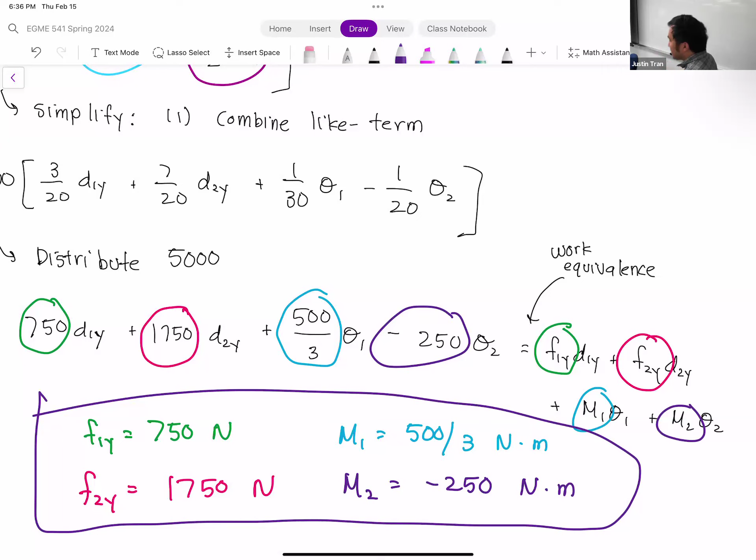So what we've done here is we've taken our distributed loading, a loading that ramps linearly and distributes smoothly, and we found their equivalent nodal loads in this case. So now if this were a real finite element problem, we can actually start the finite element problem. We can go write the element stiffness matrix and the assembly and the boundary conditions. And all this that we did is only half of a typical problem.

So you would then start the real direct stiffness problem from here. But I'm not going to do that to you guys, this was enough for today. So basically, this is just a setup for the problem. It's a setup in itself - you have to do the pre-problem, the problem before the problem.

All right. Any questions on this? Okay. All right, so that's it for beams.